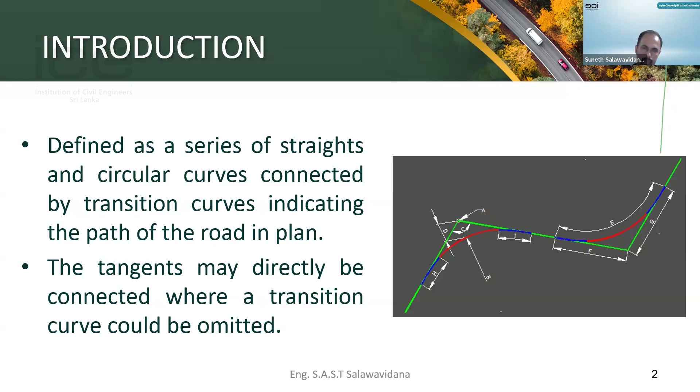Now, when we are going to do a horizontal design, what are our major considerations? Number one is safety. Profile means the vertical alignment, how you are going to do that vertically. Type of facility means the same design standards that you are going to use for a national highway, you are not going to use for a rural road. And the design concepts that you are going to use for a 4-lane road, you are not going to use for 2-lane roads. Then the design speed, that is the most important one.

What is the design speed of Sri Lankan national roads? There are two design speeds. What are they? One is 50, the other one is 70. 50 is for urban areas and 70 is for rural areas.

How do you know what is urban, what is rural? Just to look at the place and see, this is an urban landscape, so this is urban, so I have to go by 50 kmph. And then you travel and you see paddy fields and things, and okay, this is a rural area, I'll go by 70. No, that is not the way.

Now, usually the urban areas in this country are gazetted, and you have to refer to the gazette to check what is a rural area and what is an urban area, right? But you know, when you are driving, you don't take the gazette with you. Therefore, it is the responsibility of the road agency to put the speed limit. They have to put a signboard saying this is the speed here, either whether it is 50 or 70.

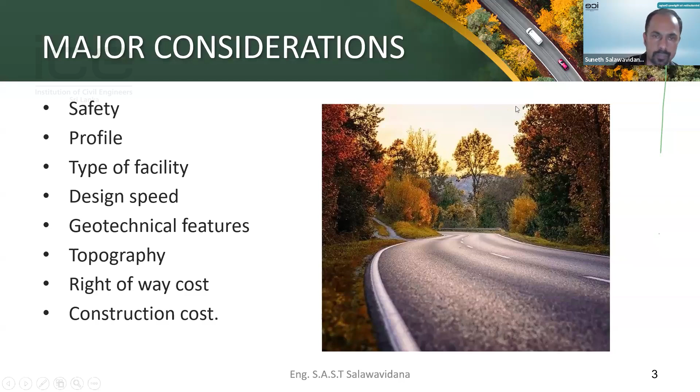So then we have to go into curve design, right? Curve design. I will tell you this one because it's very important, right? You have to consider now, these are some theory stuff, right? So maybe in the university you might have studied movement of a vehicle along a circular path, right? When you are traveling along a curve, what will happen?

Now you understand that there is an outward force that is called centrifugal force. If you don't understand this, just think of your childhood, when technology had not taken over. In our childhood, we didn't have the internet or whatever, so we had our own games. One game was taking a ball and you tie a string around it, and you take the string from the other end and then you rotate it around your head. Now, once you rotate this ball around your head, what happens?

Ball is trying to come into you or go away. The ball is trying to go away, just because of the centrifugal force. Then why doesn't the ball go away? Because there is a string and there is a tension. So there is an equilibrium of forces. Therefore the ball does not fly away.

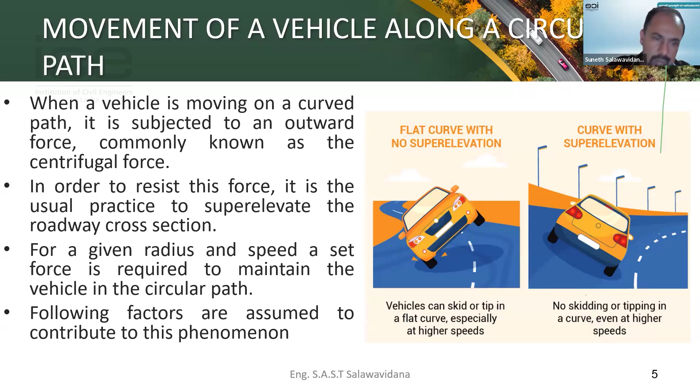So what are the factors? With that, we can prove this equation. R is radius, V is speed, E is the super elevation as a percentage, and F is the friction factor. F equals mu, mu is the friction factor, here we use it as F. With this equation, you can prove this using general physics. In my book, I have proven this.

So with this you know what should be the minimum radius that has to be provided for a given speed and for a given superelevation. Friction is usually the same. Friction can change depending on speed, but for a given speed, friction factor is the same. Therefore you can find the radius. So now you know how to get the radius for a particular design speed based on the superelevation.

Superelevation, usually we give it like 2.5%, 3%, 4%, 5%, 6%, like that. So what you have to do is, if somebody asks you, this is my design speed, say 50 kmph, this is my allowable superelevation, say 3%, now what should be the minimum radius I have to provide? That's an exam question if you are following highway design. You can find it here using this equation.

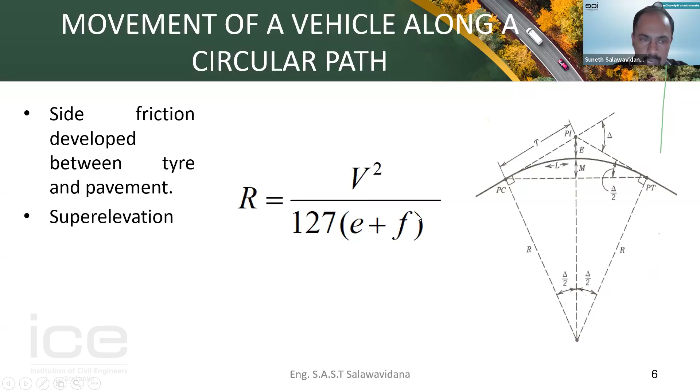So the side friction factor is F equals mu, mu is the side friction factor. That depends on vehicle speed, type and condition of the road surface, and type and condition of the tires. Once I say type and condition of the tires, you might wonder, then how do we find the friction factors, because tires are different from one vehicle to another. But the thing is, usually there are some standards for tires.

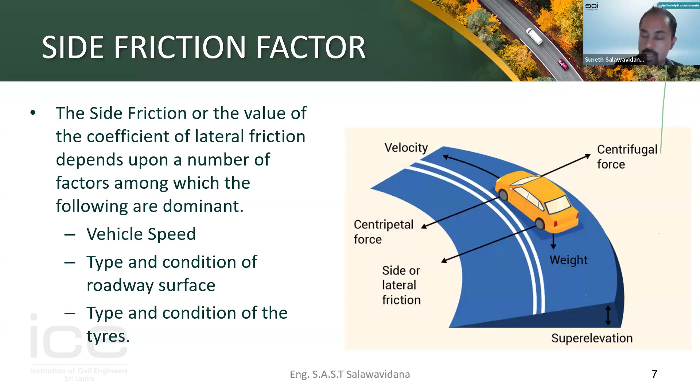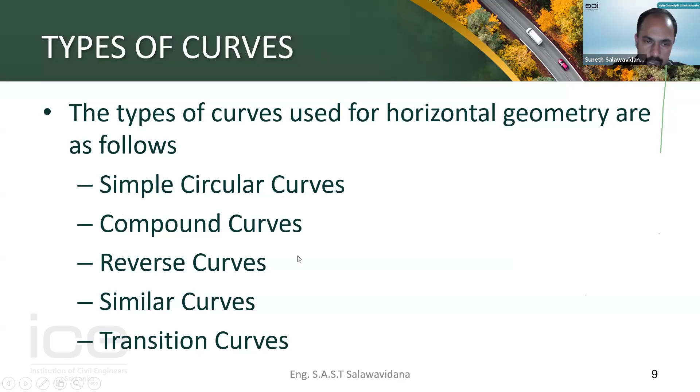And then we'll go into the types of curves that we are going to use in highways. There are a few: simple circular curves, compound curves, reverse curves, similar curves, and transition curves.

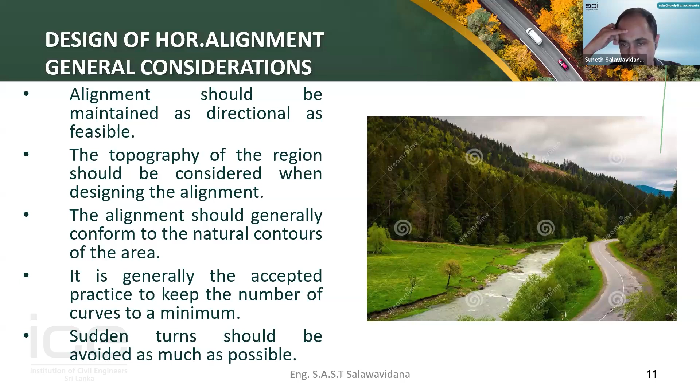So what are the general considerations of horizontal alignment? Alignment should be maintained as directional as feasible. Just think it is the year 1815, the time the British conquered us. Now they ask you to build a road to Kandy from Colombo. How do you do it? You start from Colombo, go to Galle, then come to Ratnapura, then go to Ampara, then come back to Polonnaruwa, and then come back to Kandy. Is that the way? No, you should try to have a road from Colombo to Kandy in a directional way.

That means you always have to keep in mind that I am going in this direction. Anyway, you can have some curves and sometimes you will have to come back and go, that's true, but still it should be directional.

Then you have to consider the topography. If there is a big mountain, what are you going to do? You go and cut it down, if there is no other way to go. Or else you go and put a tunnel. In the Ruwanpura Expressway, we are going to have a tunnel. Earlier we tried to cut the mountain, but geologists from University of Peradeniya came and did some research and said no, you can't cut the mountains, they are very fragile. If you cut it, there will be earth slips. So then we proposed a tunnel.

But why did we propose the tunnel? Because it was an expressway, so you can't go in a zigzag manner, you have to be very much directional. Therefore we proposed a tunnel. That's after Ingiriya. I don't know when they will build it.

Then the alignment should generally conform to the natural contours. If you are going to cut the contours, what will happen? You are either rising or falling, that is not very proper. So you have to keep the number of curves to a minimum. So although you know how to design curves, don't go and put curves everywhere.

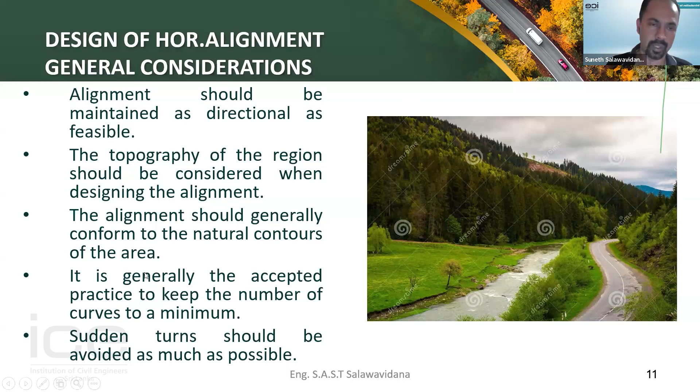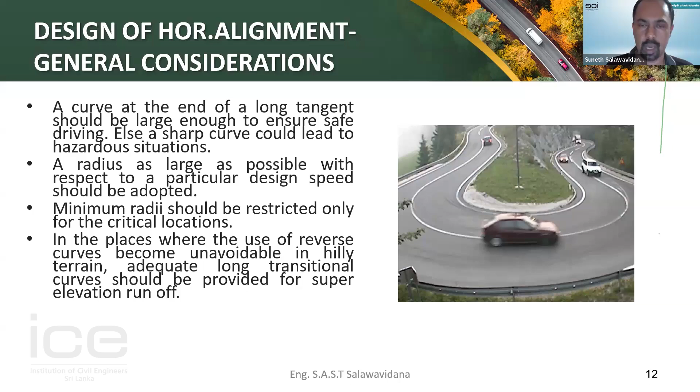So sharp curves should be avoided as much as possible. Avoid a curve at the end of a long tangent - that means there is a straight, and then you don't put a very small curve. You have to provide radii as large as possible, and minimum radii should be restricted only for critical locations. The reverse curve I will tell you later. When it comes to simple circular curves, they have to be the minimum radius for the superelevation development requirement.

What is superelevation development? If you consider a normal road, your superelevation is minus 2.5 - that is why the road is slanted down at minus 2.5.

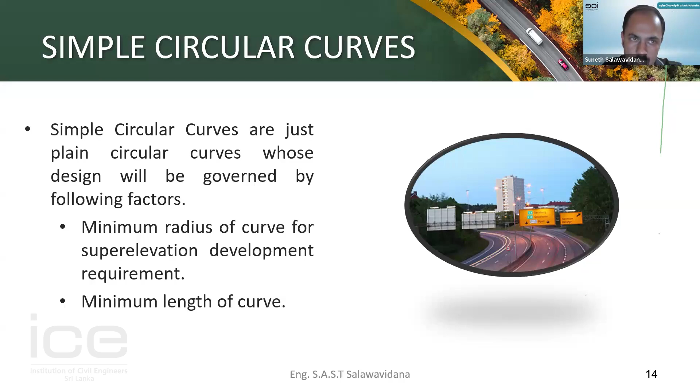Just think somewhere you are going to use a superelevation of 3% in one curve. Can you abruptly change minus 2.5 into 3%? Then there will be a step on the road. So you have to gradually change the superelevation from minus 2.5 to 3%. For that, you need a particular length, usually 30 meters, 45 meters, or 60 meters, something like that. You have to consider that when you design a curve.

Design speed of the curve should represent the speed below which most drivers operate. What does that mean? You go and design a road, say for 30 kmph, but many drivers wish to drive there at 50 kmph. What about your design? It's a poor design.

This happened to us when we designed the Hatton-Nuwara Eliya road. This road was designed by me and one consultant. Those days, before improvement, the design speed was 30, right? So we had a massive investment and we developed it. After that, what was the design speed? Still 30. Why? Even though we widened the road, we could not improve the curve radii because it is heavily costly.

Then again we had to go and put that 30 kmph signboard. The people were worried, even our RDA people were worried - my God, after this much investment, we haven't improved anything. But it is not only the design speed that has to be improved.

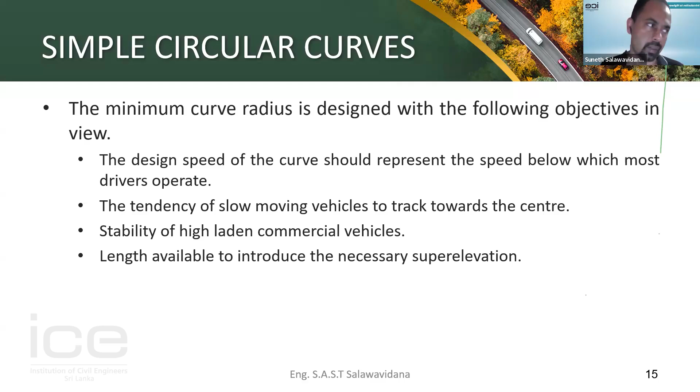There is something called sight distance - how many meters you are going to see ahead of you. That is necessary for you to stop when there's not an accident, say just some obstacle on the road - you should see ahead to stop it. And you should see ahead to overtake a vehicle. These are the things you have to think about.

Depending on the superelevation and depending on the design speed, these are the radii in meters that you have to employ. If you want, you can use the equation R equals V squared over 127 times (e plus f), and calculate it, or else you can easily use this table.

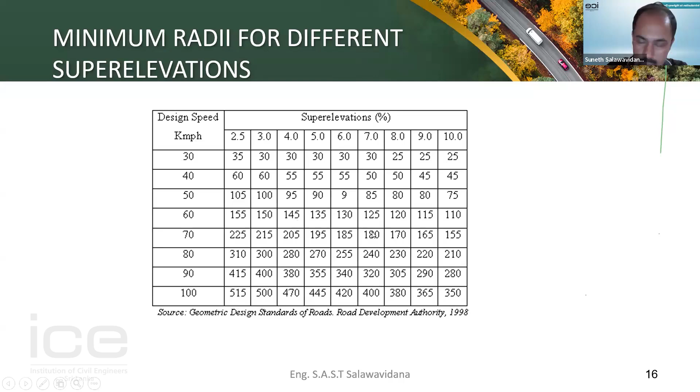What do you mean by adverse crossfall? What is centrifugal force? That is mv squared over r. When r increases, what will happen? Centrifugal force is going to be less and less. When r is 100, it's going to be less. When r is 1000, it's going to be less. When r is 10,000, it's going to be negligible. So once it is negligible, friction itself can resist the centrifugal force.

In those places, we call it adverse crossfall. There we don't super elevate - instead, we put that crossfall as minus 2.5.

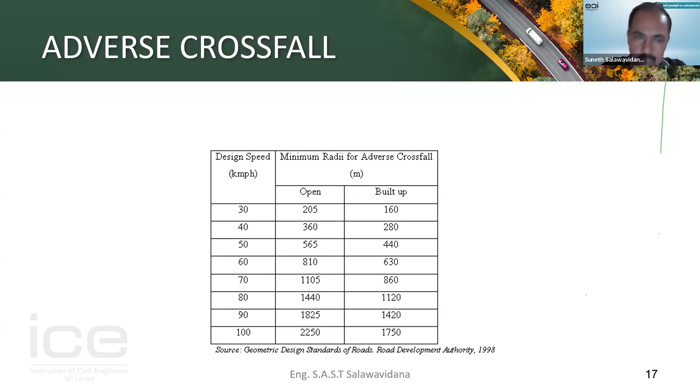The transition curves I discussed, that is the radius. It goes from some particular value to, in this case, infinity, and here from a particular value to infinity, like that.

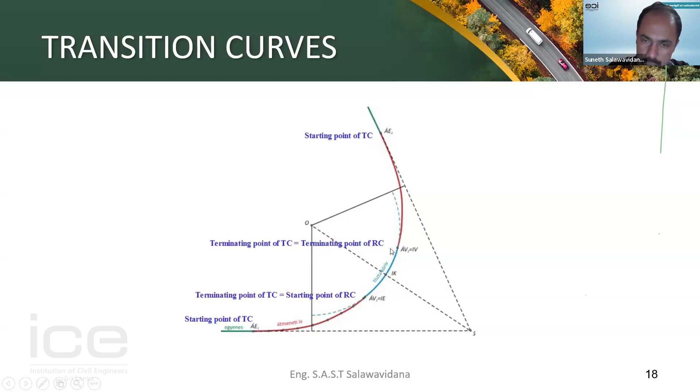I'm not going to read all these things, but I'll tell you why we put transition curves. I think most of you have got your license. It's not like our days, when most people got the driving license after passing out from the university. These days things are different, so most of you may be driving vehicles.

When you are driving and taking a turn, or entering a bend - we call it a curve in engineering, generally a bend - you don't suddenly take that turn. Even unintentionally, you take a kind of spiral path to enter the curve, and you do this within the width of the lane. But when speeds are high and curves are narrow, you will not be able to do this within the lane width. In that case, you end up occupying the opposing lane.

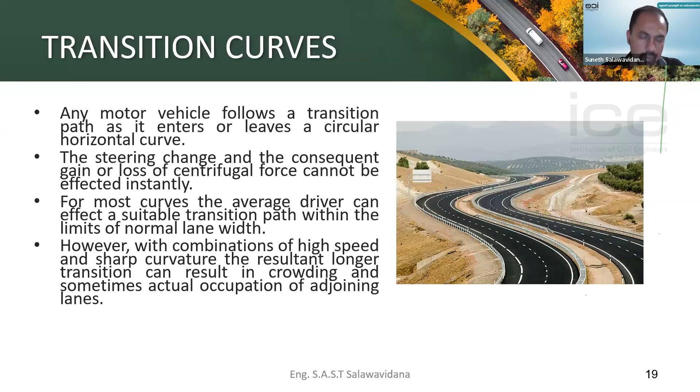To avoid that kind of thing, we provide transition curves.

Then compound curves - two curves in the same direction with different radii. Why do we do this instead of connecting PC and PT with one curve? We can, but if we do that, it won't go through the PCC point. So why is it necessary to go through the PCC point? If there's no such requirement, of course you can have one curve.

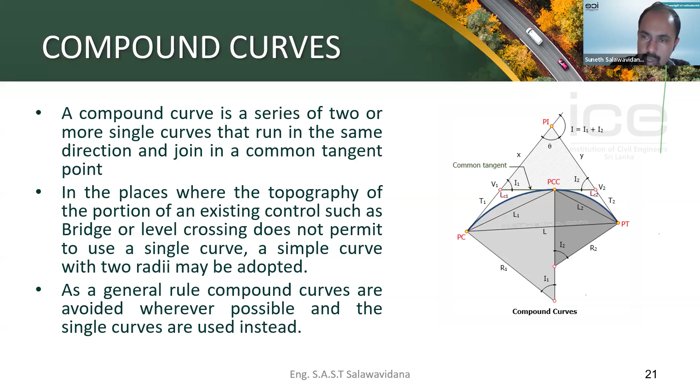But if there is a requirement, you may wonder why. Just think that at that PCC point there is a bridge - can you demolish a bridge and design another thing? No, you can't. It's very costly, and for every road improvement we don't go demolishing bridges. So if there's a point you definitely have to go through, you use compound curves.

Then reverse curves are curves having different, opposite directions, like this.

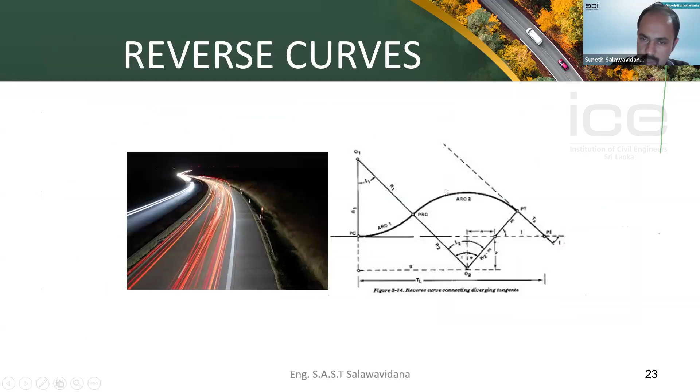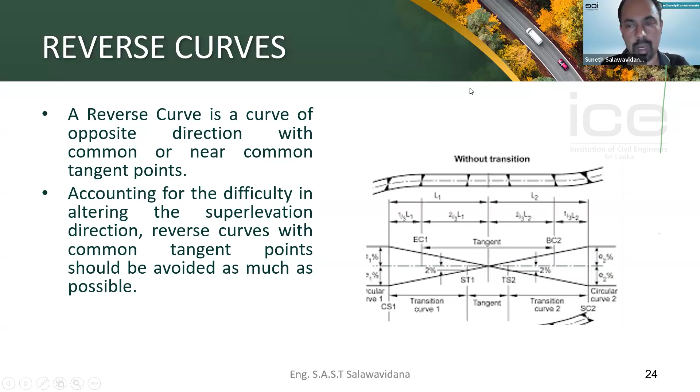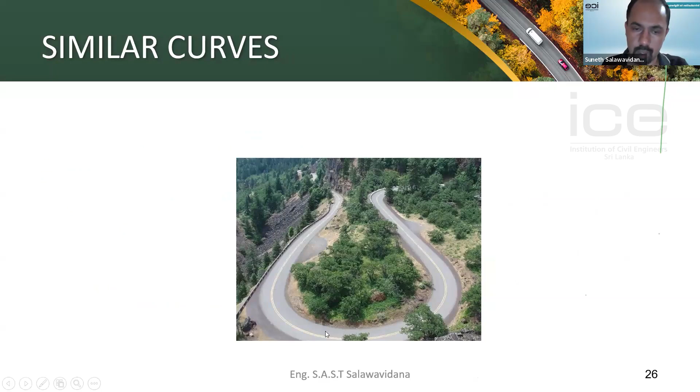Therefore these reverse curves are not very preferable, but if you can't avoid it, you will have to put it. You can see here how they are located. Similar curves are two curves separated by a small tangent - these are also not very preferable.

Then widening - maybe you've seen this. What is the normal lane width? In Sri Lanka we usually go for 3.5. But due to speed and narrowness of the road curve, if you cannot turn within the lane width - especially for a heavy vehicle - they are unable to take the turn within the lane width.

Then what do they do? This is very visible from Avissawella to Ginigathena - heavy vehicles come and end up occupying the opposing lane. To avoid that, we provide additional widening, called widening of carriageway on curves. This is also visible from Balangoda to Haputale.

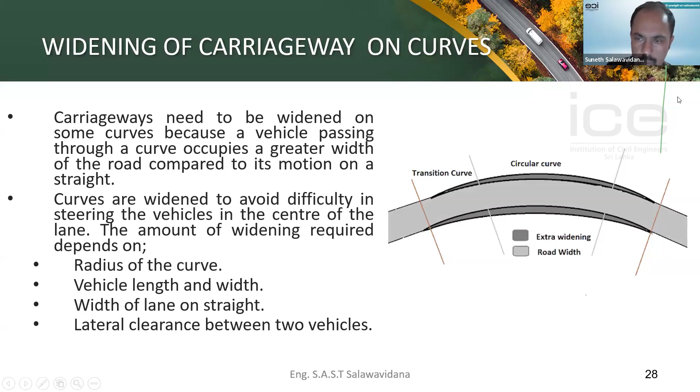That is the end of my first part, so we'll go to the second part.

I think you can see my screen now. Yeah, you can't see it? No sir, it's not visible. Sure, I'll share, give me a second. Now is it visible? Yeah, now we can see. Right, okay, thank you.

Now, as I told you before, there are two projections: one is the horizontal alignment, the other is the vertical alignment. We know something about horizontal alignment already. Now the vertical alignment is here - this is how we design a road. You have to have two straights, and these two straights are connected by a curve. In the horizontal curve it is a circular curve, and in the vertical curve it is a parabolic curve. So usually the longitudinal profile of a road consists of straight gradients and vertical curves.

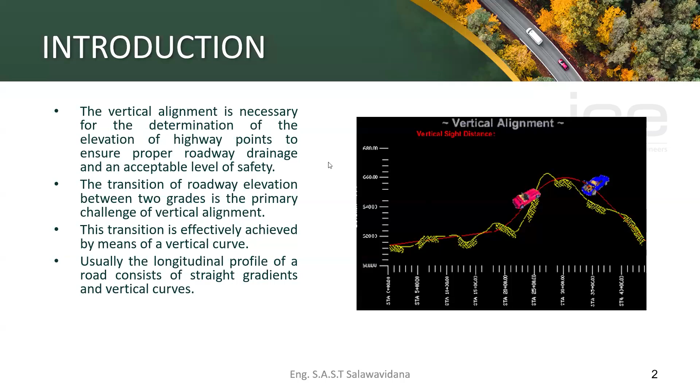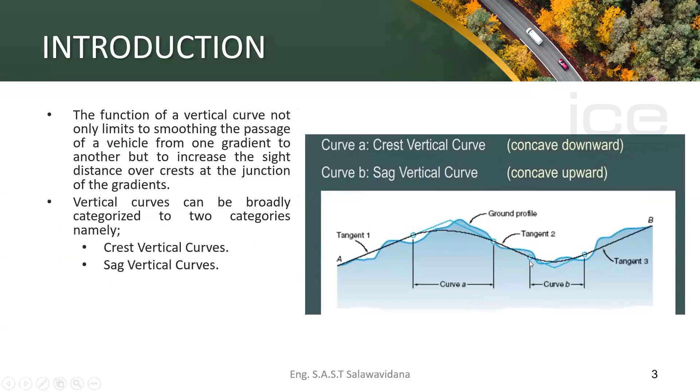Right, now here there are two types. Can you see here? This is what we call the crest curve, just an English word. Crest curve. This one we call the sag curve.

So what are the general considerations? The following general controls for vertical alignment should be kept in view when designing the vertical profile of a road. The selected grade line shall be smooth with gradual changes. That means you should not have abrupt or steep slopes. They should be consistent with the class of the road and terrain type.

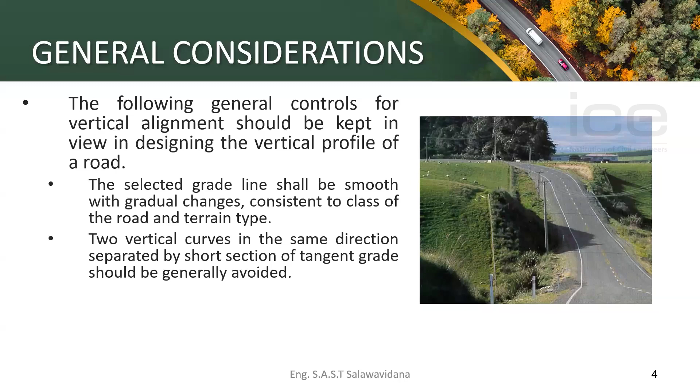Two vertical curves in the same direction separated by a short section of tangent grade should generally be avoided. Usually we call them roller coasters. Have you seen roller coasters? In Sri Lanka we don't have many, maybe in Leisure World you have one, I don't know any other place. But if you go to Singapore or Korea, they have very nice roller coasters. A roller coaster means you come down, there's a sag, then you go up, there's a crest, and then you go down again, another sag like that. That's good for a roller coaster, because we go there to get a thrilling adventure. Do we travel on the road to get a thrilling adventure? No. Therefore, we should not design roads like that.

Then usually on long grades, it may be preferable to place the steepest grade at the bottom. So the maximum grade in a national road is usually 6%, so you start with 6%, then try to reduce it to 5%, 4%, 3%, and at the top it should be flat. But don't do it the other way, starting from 1%, then going to 2%, then 3% - that is not going to work, that is not very good, because we have to consider the braking distance and all these things.

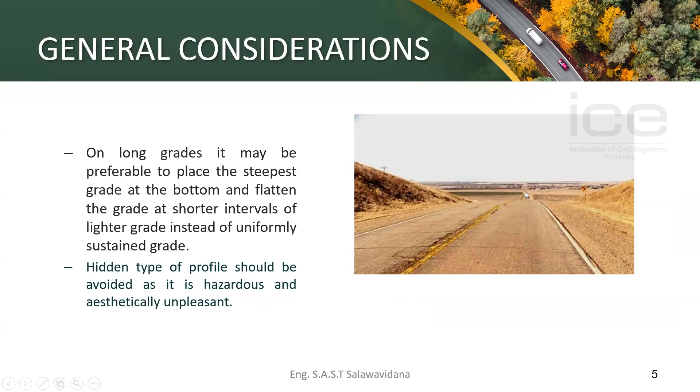There's also the hidden type of profile. Can you see this one? Hidden type - when you are going this way, you don't see this profile, so these are bad designs. In connecting a roadway here, this is not a very good design. Maybe this was the only way they could do it, but it's not very good - there's a crest here in the vertical alignment, and in the same place you're also having a horizontal curve. Horizontal curve and vertical curve should not be put in the same place. That is not a very good design.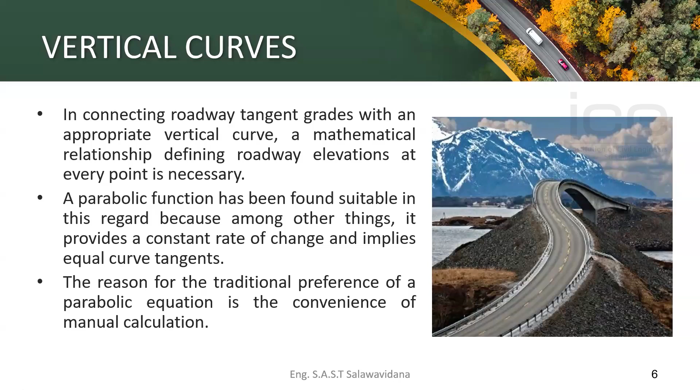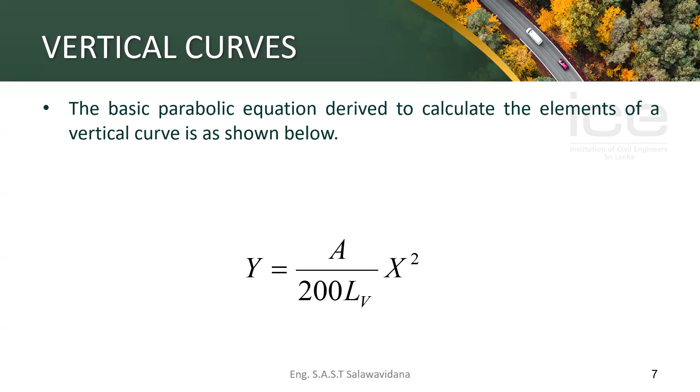So this is the vertical curve equation: Y equals A over 200LV times x squared. A is the difference of gradients - if one gradient is 3% and the other is 4%, it's 3 minus 4 and the modulus of it. And L is the curve length. So this is the parabolic curve.

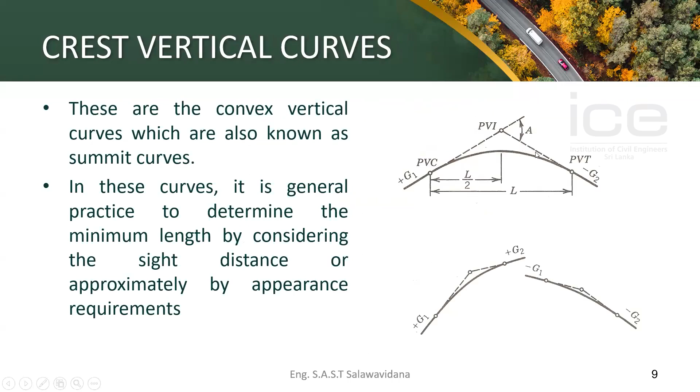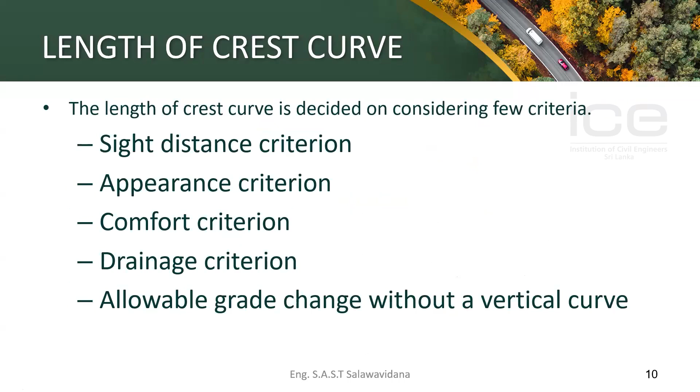There are two types. These are crest vertical curves, also called summit curves - they are convex. Then how are we going to design a crest curve? There are a few criteria: sight distance, appearance, comfort, drainage, and allowable grade change without a vertical curve.

We'll discuss them. Sight distance means when you are going this way, there should be a line of sight. If you flatten the curve, this line of sight is going to be very high. If you make it narrow like this, then the line of sight is going to be less. So there are some particular values you have to keep when designing.

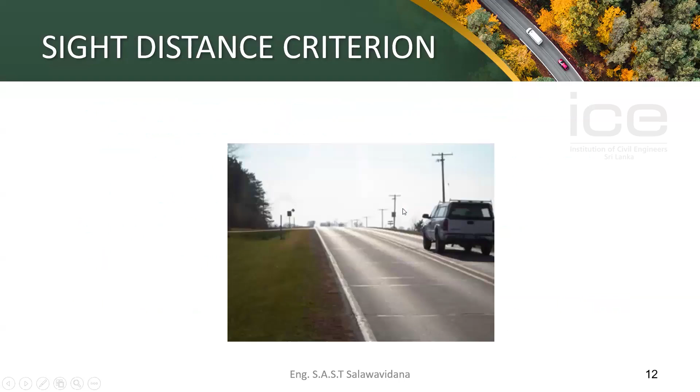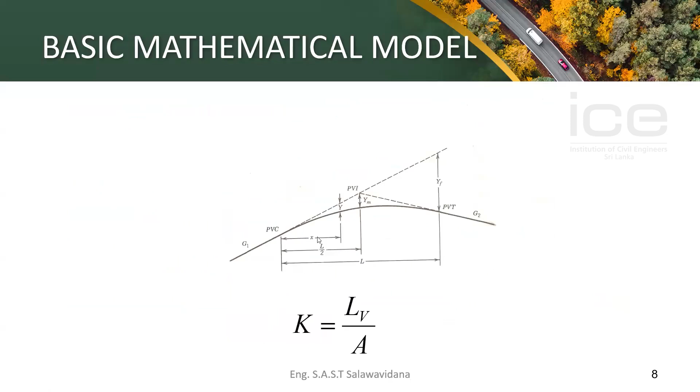I will just give you what is stopping sight distance, continuation sight distance, and overtaking sight distance. Stopping sight distance is - if you're traveling on a road and you see an obstacle, there should be a particular length for you to stop safely without hitting that object. And that stopping sight distance should be maintained throughout the road, otherwise it's a very risky road.

Then the overtaking sight distance is - just think there is one crawling vehicle going in front of you and you are trying to overtake, occupying the opposite lane. These are only for two-lane roads. If the road is segregated or separated, then you need not have overtaking sight distance.

Now, the overtaking sight distance is - okay, you are crawling behind the slow moving vehicle. Then you take your vehicle into the opposite lane, accelerate it up to the design speed, and then come back to the left lane. For that you want a sight distance of some length. That is called the overtaking sight distance.

If you consider continuation sight distance, just think by hook or crook, now you are in the opposite lane. After that, how many meters you want to continue your maneuver - that is called the continuation sight distance. So if you are going to provide these three sight distances, these are the K values you have to give.

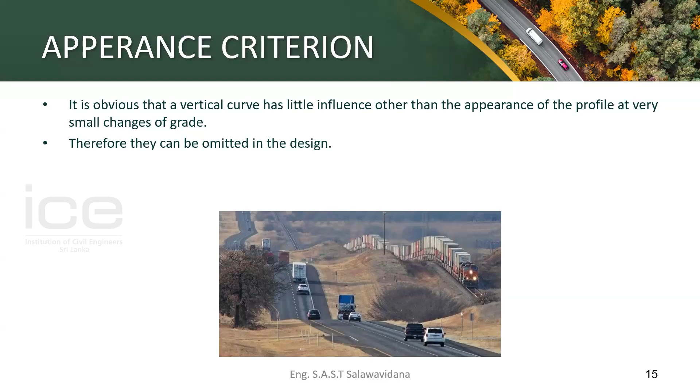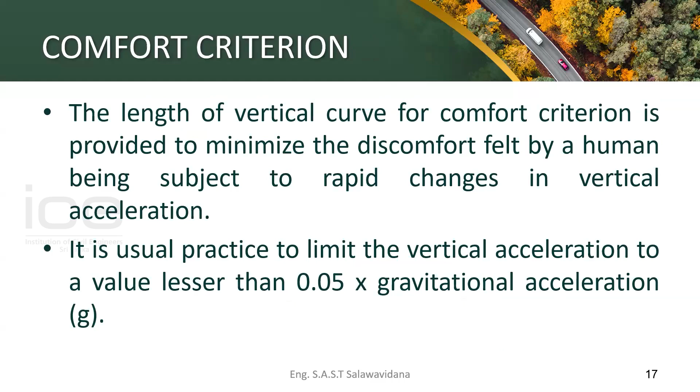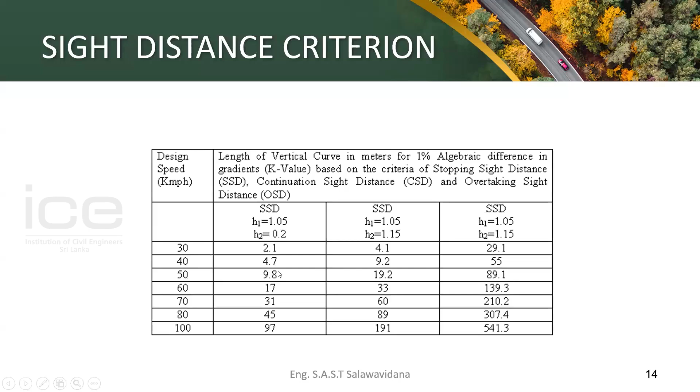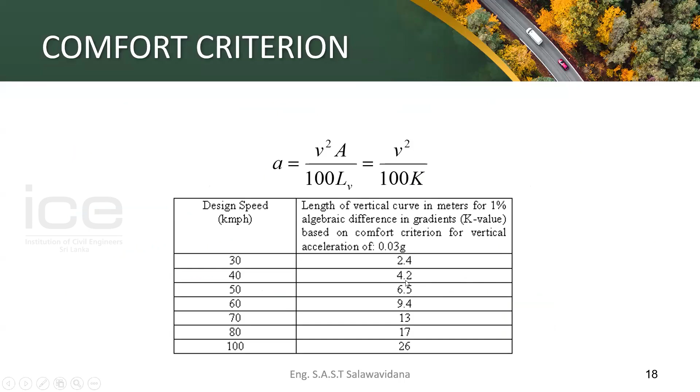Then the comfort criterion - there should be comfort. If you are going to have some narrow curves, it is not going to be very comfortable, so for that also you are going to have some values. Say if your design speed is 50, you have to have a minimum K value of 6.5 to ensure the comfort criteria. But remember, you have to provide 9.8 for the sight distance, which has to be maintained throughout. So once you provide 9.8, the 6.5 is already satisfied.

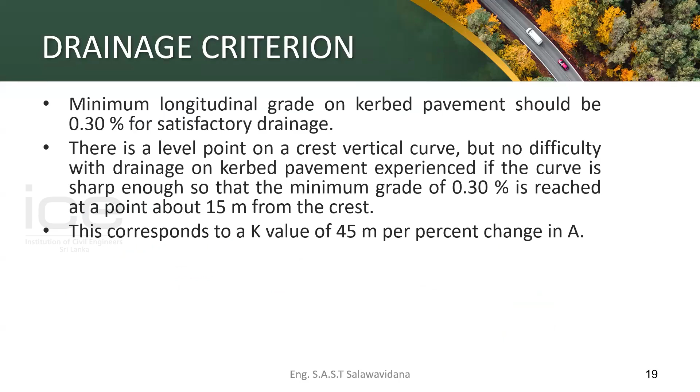Then the drainage criterion - of course you have to keep a minimum 0.3 gradient for drainage. Then we'll discuss a little bit about sag vertical curves.

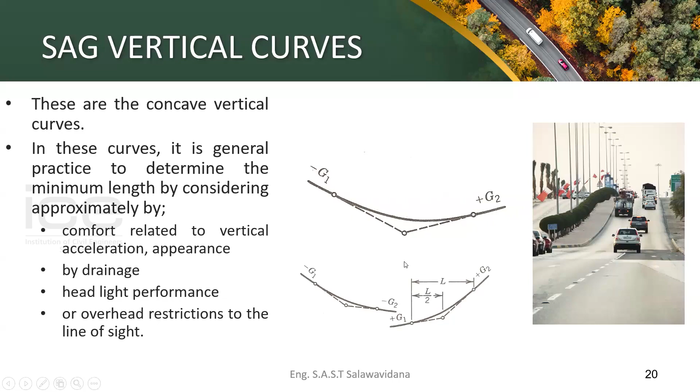It is just the same curve, but in the other direction. Again you have to consider - now, do you have to consider the sight distance here? No, why? It is already visible. But you have to consider comfort related vertical acceleration, appearance, drainage, headlight performance, or overhead restriction to the line of sight. What is this headlight performance? We'll discuss.

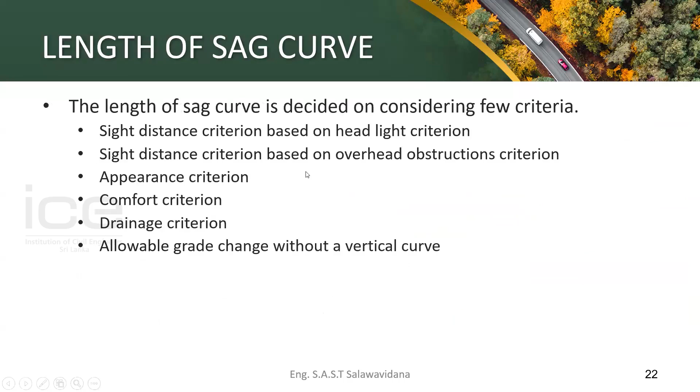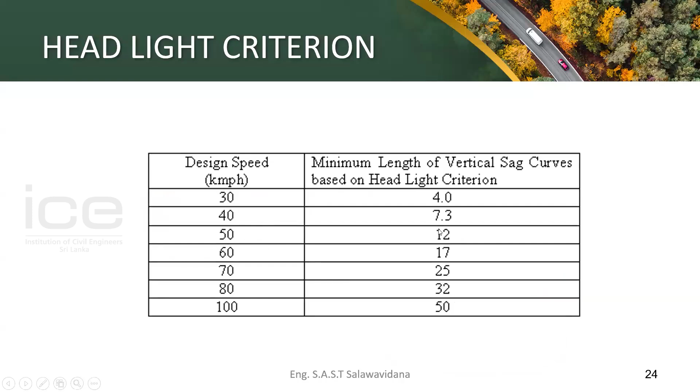This is because the sight distance on the sag vertical curve is unrestricted in daylight. But depending on the headlight, you have to provide the minimum sight distance. So here also you have to give the minimum values. If it is 50, you have to provide a minimum K value of 12, otherwise the headlight criterion is not going to be satisfied.

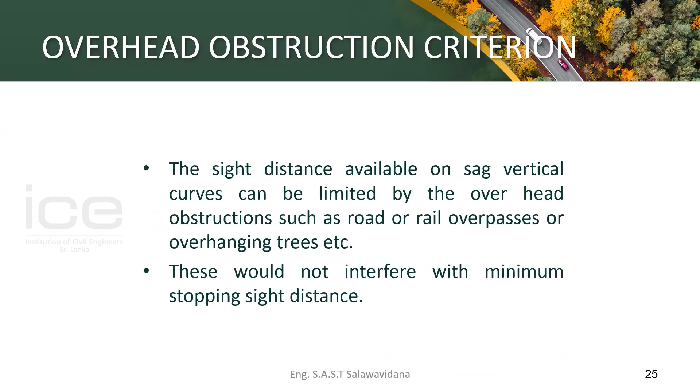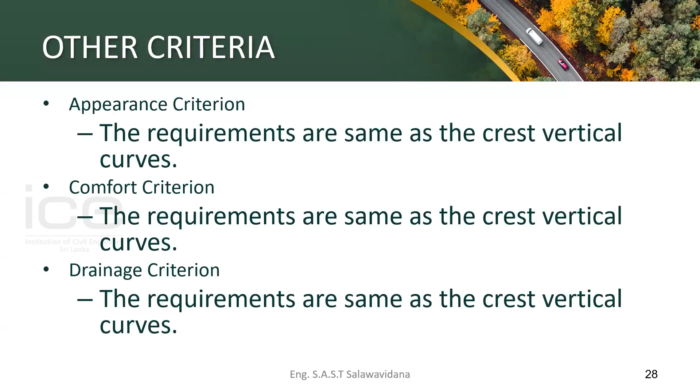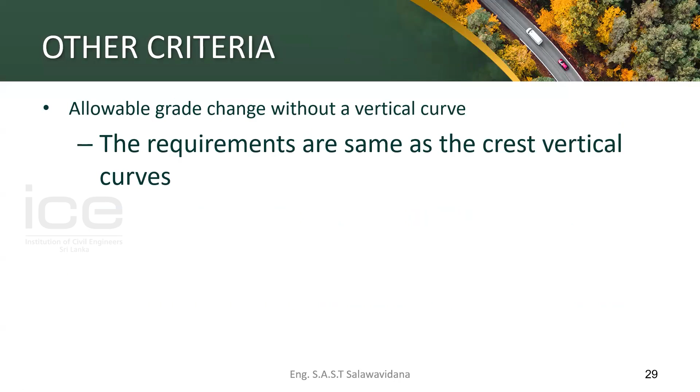Allowable grade change without a vertical curve - what does that mean? So I told you, if it is a very small grade change, say 3% one gradient and 3% two gradient, they are going to be connected together and you are going to provide some curve. Maybe you need not have a curve if that gradient difference is very small.

Then we'll discuss a little bit about grades. Grades are the slopes, the gradients that you are having in the road. There are three types of terrains. One is level terrain. If you are not very much familiar with this terrain, I will give you an example. Level terrain - I think most of you have gone from Colombo to Kandy, right?

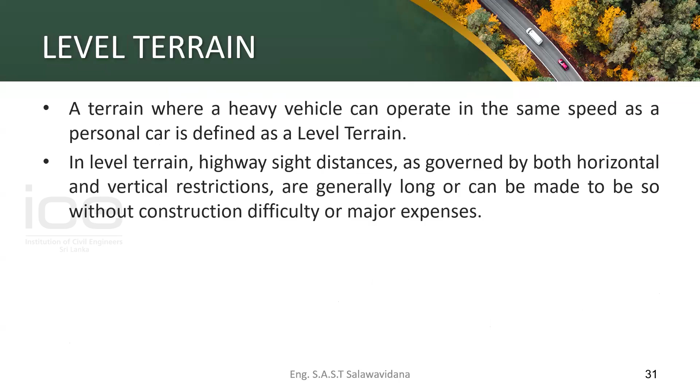So I'll just take the equation. If you want to consider level terrain, think from Colombo to say Warakapola. It is level terrain, right?

And then we have rolling terrain. Rolling terrain means you have mountains and sometimes you have flat roads. Just think if you start from Ambepussa to Kegalle, there it is rolling terrain. Sometimes it has gradients, sometimes it is flat.

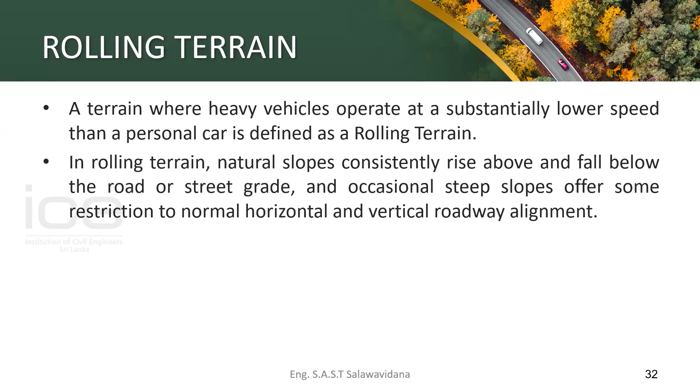The mountainous terrain - of course, you can think about Kadugannawa. A terrain where heavy vehicles operate at crawl speed - you might have seen that, right?

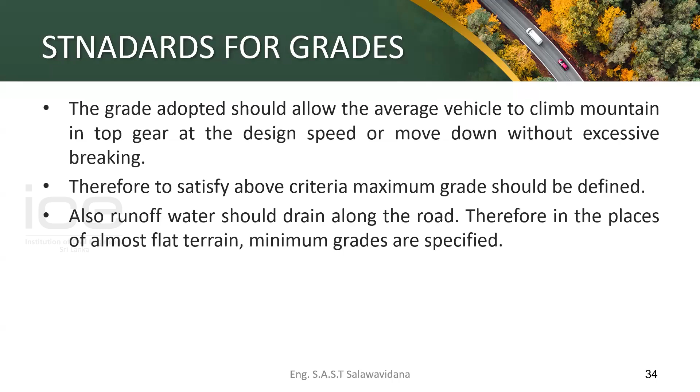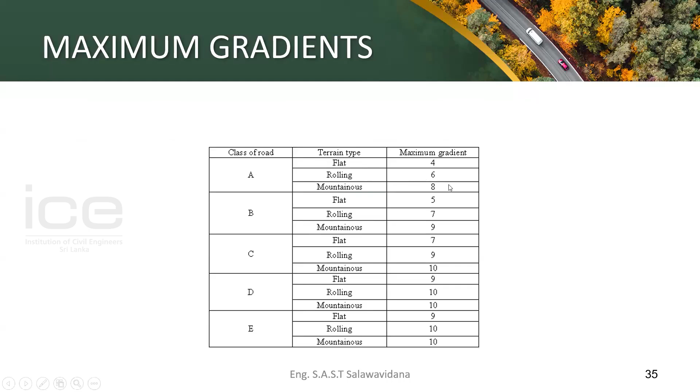These are some standards for grades, showing the maximum gradients you should provide. If it is a class A road, say Colombo-Kandy Road, in flat terrain you have to provide maximum 4%. Rolling terrain should be maximum 6%, and mountainous terrain should be maximum 8%. If you provide more than that, your design is substandard.

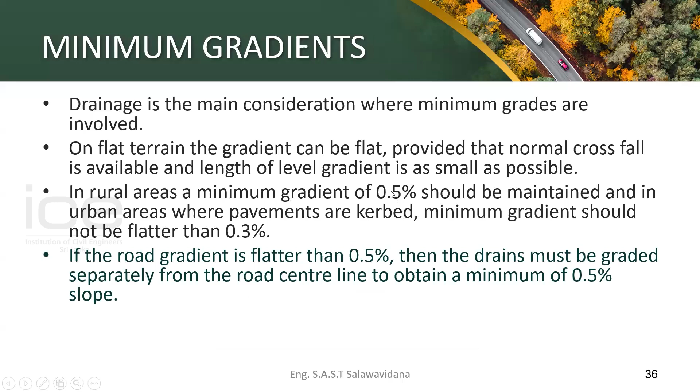Then there are minimum gradients also. Minimum 0.3 you have to provide. In urban areas it is 0.3, and in rural areas it should be 0.5.

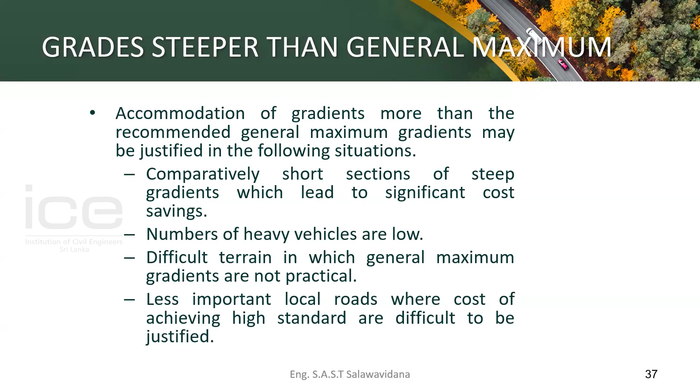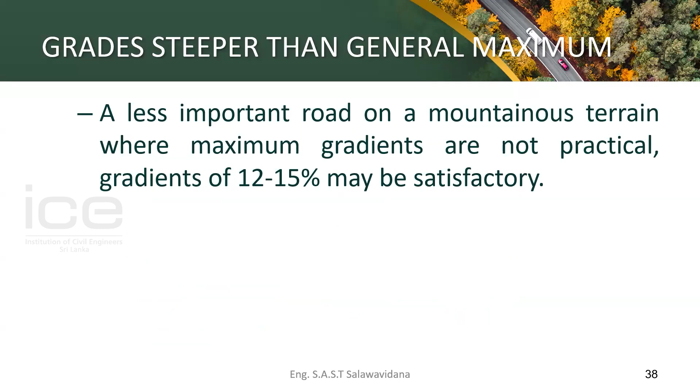Then there's a grade steeper than general maximum. Say for a national road you have to provide 8% gradient, but sometimes you may have to provide 10%. There are distances you can go with these gradients. For less important roads on mountainous terrain where maximum gradients are not practical, gradients of 12 to 15% may be satisfactory.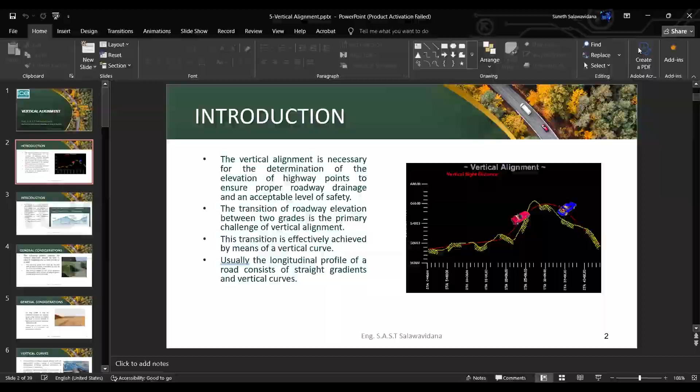So that is the end of our lecture, but I'll just show you a drawing that we have prepared. Give me a second.

First we have to go to Civil 3D and then open it. Give me a second... it says that I have to sign in first, so we don't have time.

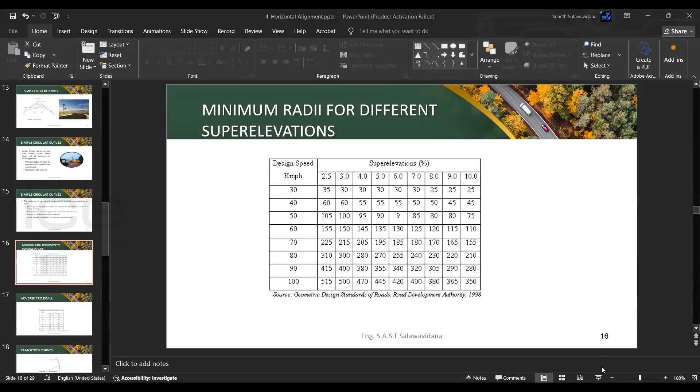Now maybe I will show you. Give me a sec. Now can you see, sir? Yes, now we can see. Just see here: if you consider a design speed of 50, if your super elevation is 2.5%, 105 is the minimum curve radius you can use. If your design speed is 50 and you selected 3% super elevation, minimum curve radius is 100.

So if you are asking what is the minimum radius that can go in the national roads, usually our national roads are designed for 50 kmph. So the minimum radius should probably be say 90 or something, because even though there are lower values, we don't go beyond that in general. But in places where you cannot design for 50, sometimes we have gone for 30 kmph in some extreme locations. There, as the minimum design radius, we go for 30 meters at 30 design speed, with 30 radius we can go with 3% super elevation. Is that the question you asked me?

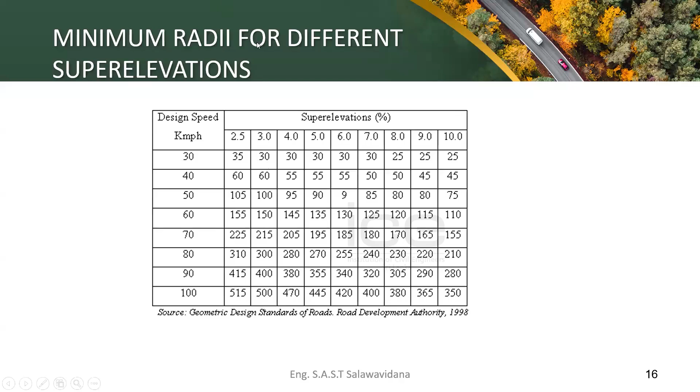Yes, sir. Yeah. Okay, any other questions? I'm Hirsha from KDU. Am I audible?

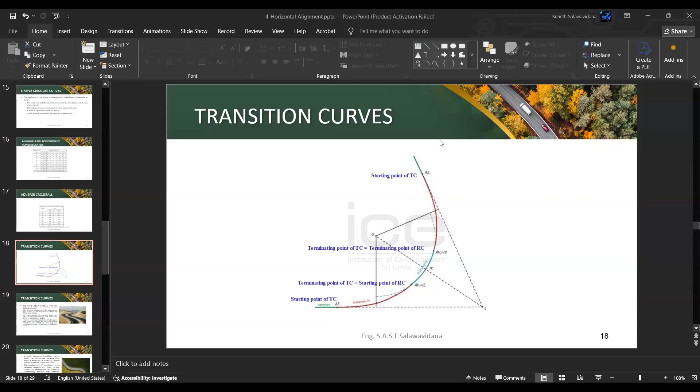Another question I have. Yes, thank you very much, sir, for your presentation. Okay, thank you very much.